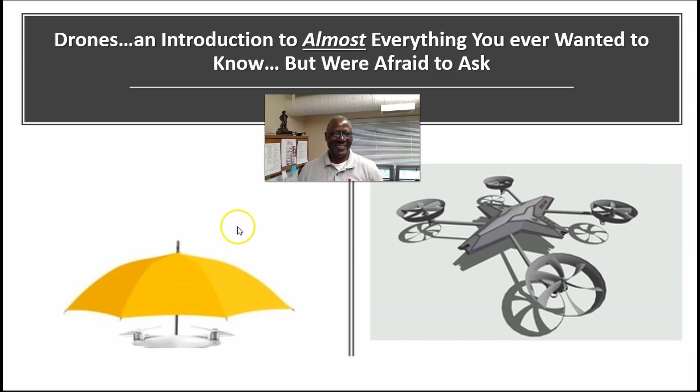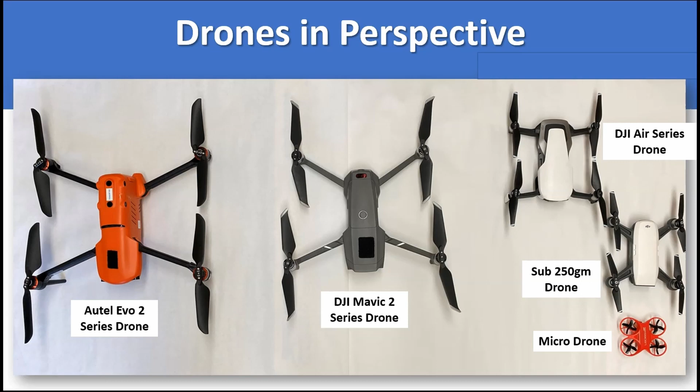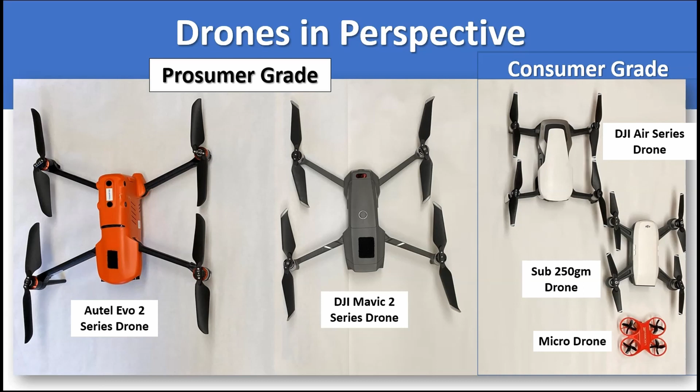Now I break these drones down into two types of categories. One, you have your consumer grade drone. It's not to say you can't use these drones for other things, but the primary purpose is for the typical consumer. They're using it for photography, for entertainment, for hobbyists, for recreation. Then you have what's considered the prosumer drone. The prosumer grade drones are those used in business, for work, for landscaping, for construction, for inspections, and those types of things.

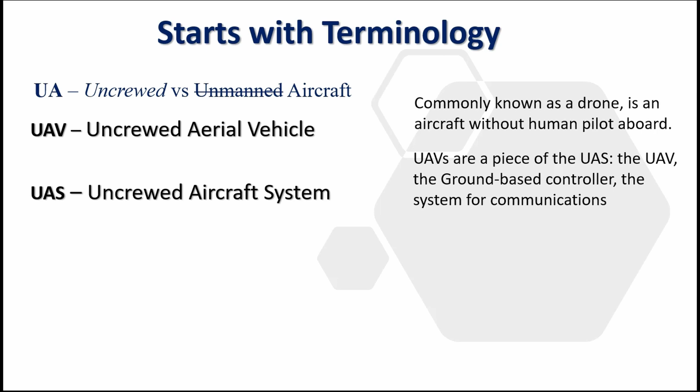Let's start with the terminology. The terminology UA, or uncrewed versus unmanned aircraft, is something the FAA and others are now trying to move away from to make it more gender neutral. The UAV, or uncrewed aerial vehicle, commonly known as a drone, is an aircraft without a human pilot, and that's the important piece. The pilot isn't aboard the drone actually operating it and causing it to go one direction or another. The UAS, or the uncrewed aircraft system, includes a UAV as a piece of the UAS, and all that term really means is that you're including the other components that go with the drone itself.

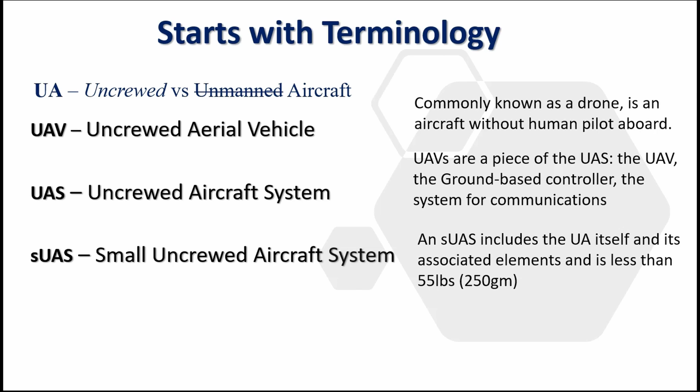Finally, the SUAS, or small uncrewed aircraft vehicle or system, is anything below 55 pounds and above 250 grams. This is often considered a distinction without a difference, because you hear the term drone and often you'll refer to it or reflect on some type of drone.

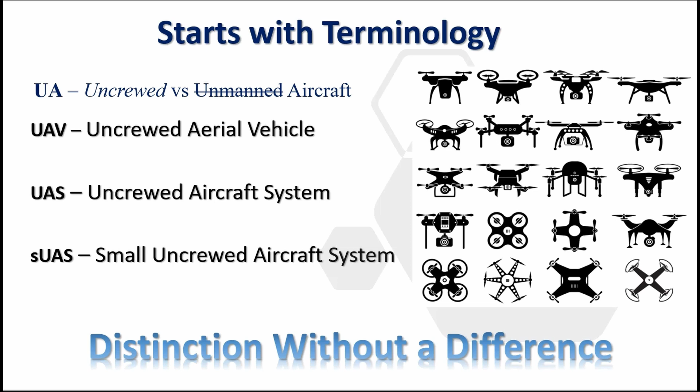As you'll note in this simple pictograph, the drones have a variety of different configurations as well as their specific capabilities and abilities.

Oftentimes, people mistakenly think that drones are there to spy on you, or to look into windows, or into glass doors or whatnot. So what I did was I put together a very short video to demonstrate that that's not quite the capability of a drone.

So that's hopefully going to help debunk the myth that drones are used to go and spy on people or to look in on people.

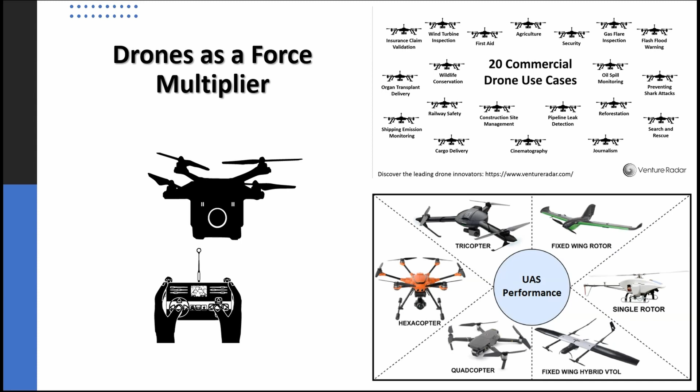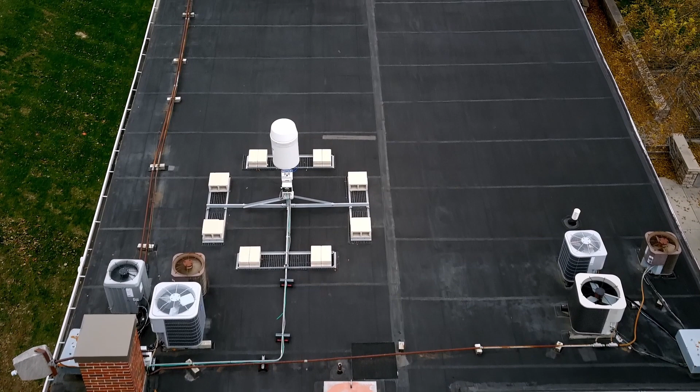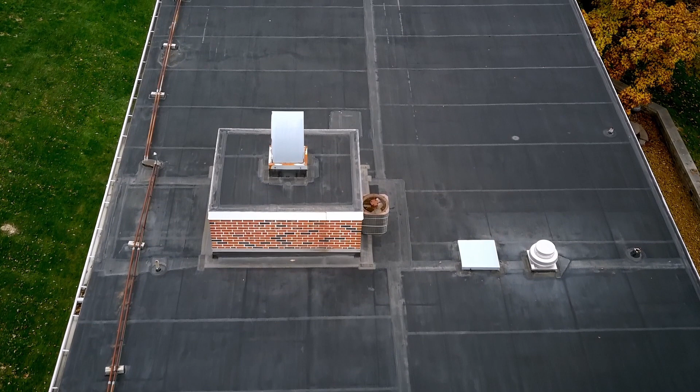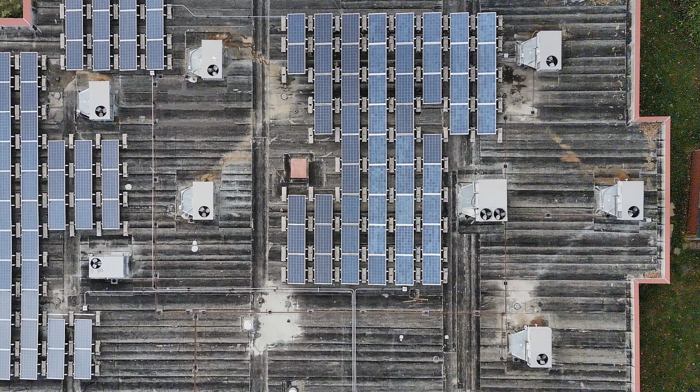One of the most common uses for drones is the roof inspection or roof assessment. This saves both time and increases the amount of safety.

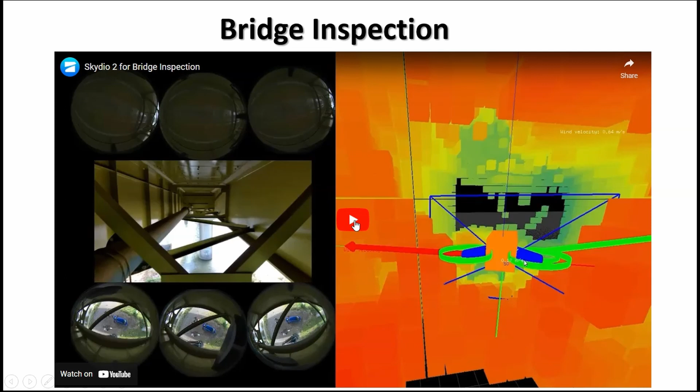The next use case is bridge inspections. Bridge inspections are by and large very hazardous, very time consuming, and can be very difficult to do, and for that reason they're almost always done by hand, in person, one bridge at a time.

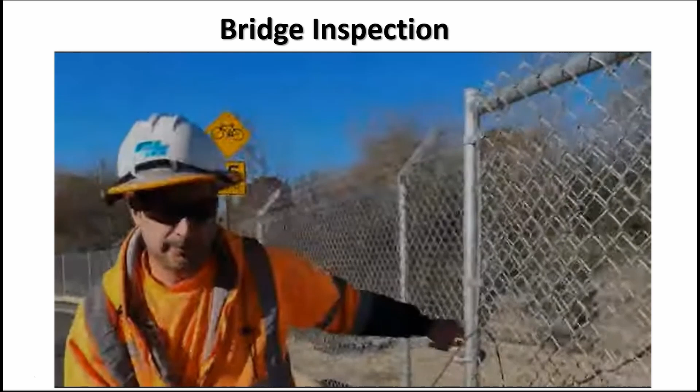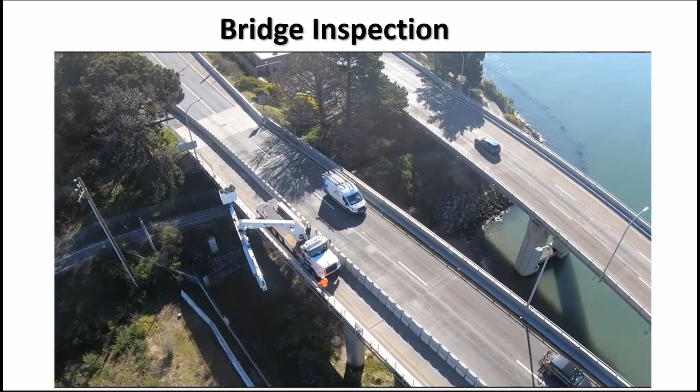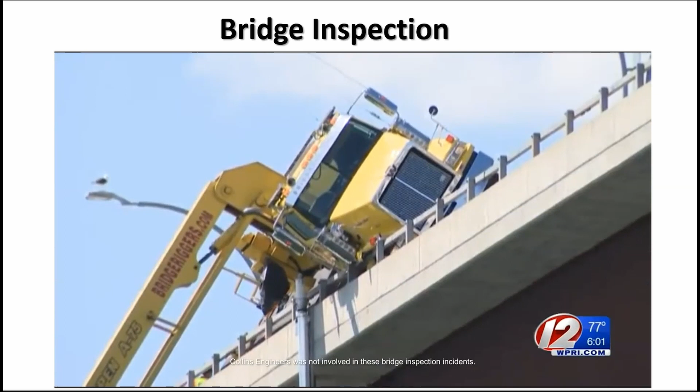In this case, the bridge inspection was being completed. However, the truck used to conduct the bridge inspection has 2 people on the underside. This truck had an incident and it fell over. As a result, the individuals were trapped in the truck until they could retrieve them with another truck and pull the bridge inspection vehicle back.

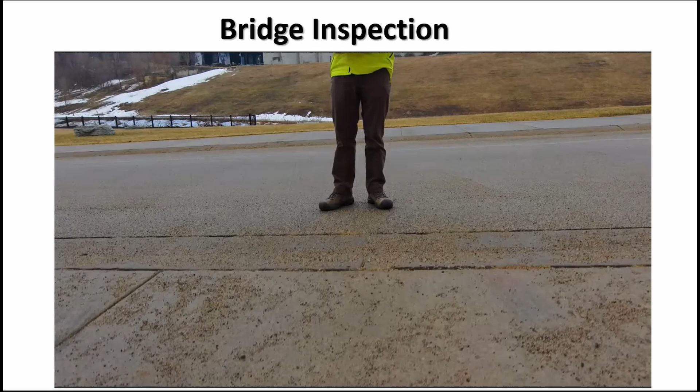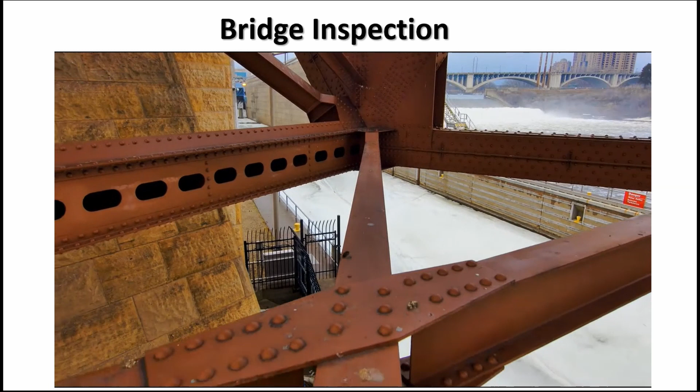When they were using a drone, in this case this particular model, they were able to conduct the same bridge inspection with no mishaps. Using the drone, they were able to get inside, get high definition photos and videos, and very accurate locations of areas of interest for the bridge itself.

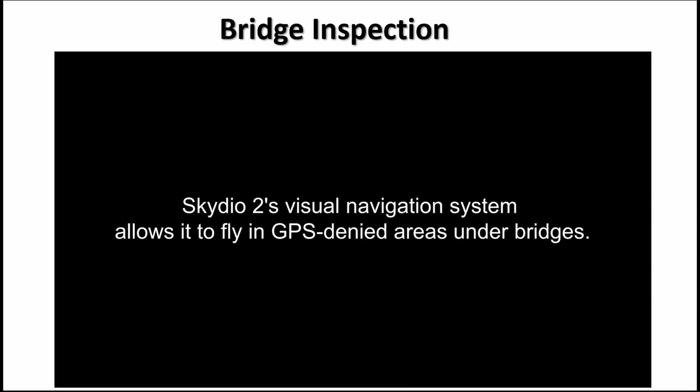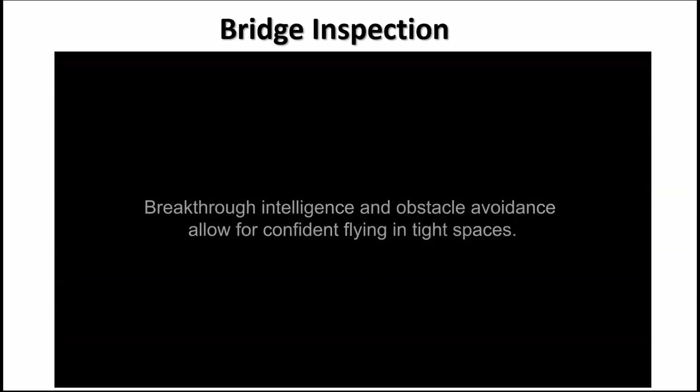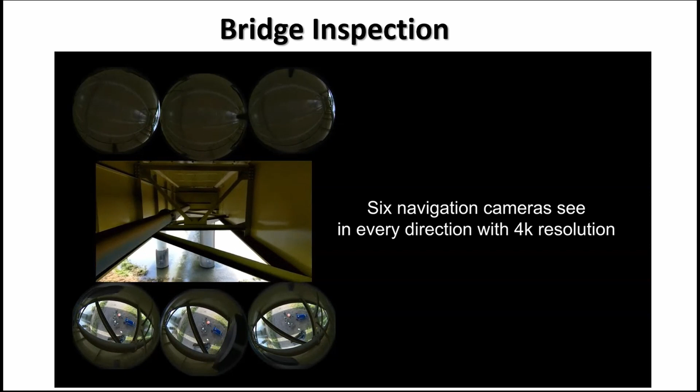Even though the bridge is made out of primarily steel and concrete, the GPS, or Global Positioning System, that is usually needed for most drones wasn't needed in this case. The drone is able to navigate autonomously by building its own reference as to what that area looks like. This keeps the drone from running into areas on the bridge and crashing.

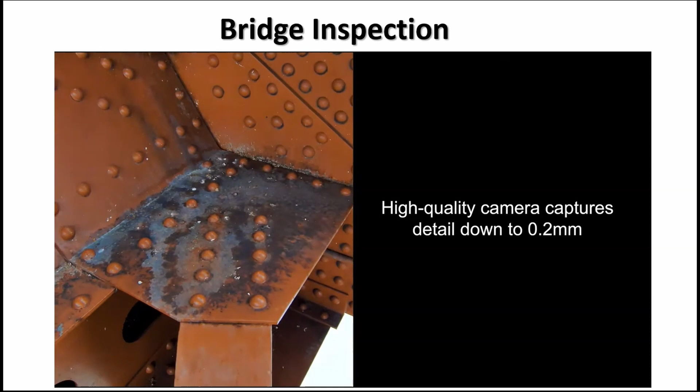The high quality camera really came in handy for this particular bridge inspection.

Oftentimes, you will see drones used in cinematography. In this case, this is a short video clip from the movie Ambulance. In this movie clip, what you can't see is where the drone is actually flying, but what you can see is the results of the drone. Let's take a look.

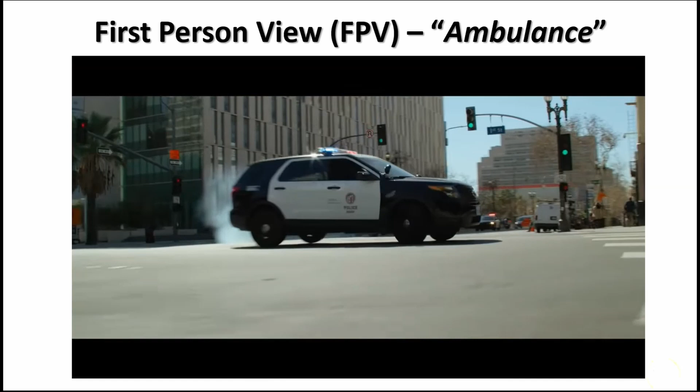This is one of the foremost experts in drone flying. He is a champion drone flyer. These are scenes that are shot with the drone, and you can go on YouTube and download this or take a look at this in depth. But what the actors and the others are saying is that with the drone, you can get other pictures, other scenes, other dimensions that you couldn't get otherwise.

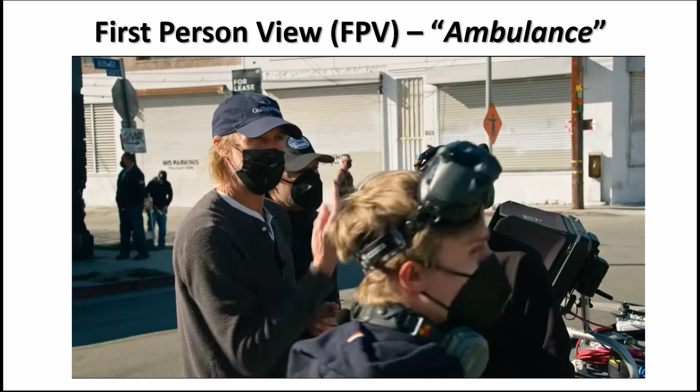Here are some of my favorite pieces of the movie. Once you get into the movie itself, you'll see how very technical, difficult, and challenging it is to fly the drone at high speeds in these particular areas.

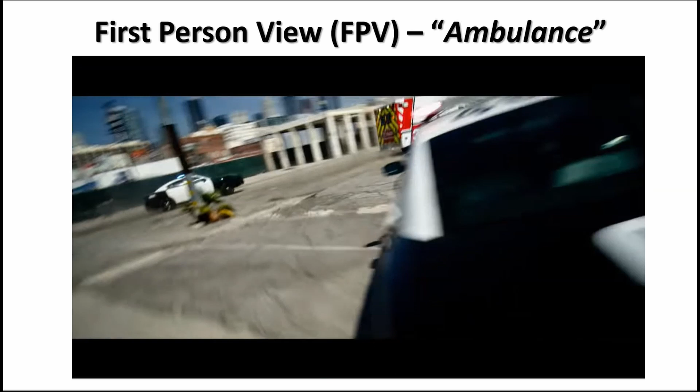This is called, again, FPV, or first person view. So this is a shot that you couldn't get with anything other than a drone, unless you drop a camera from a helicopter. This is another shot of the drone.

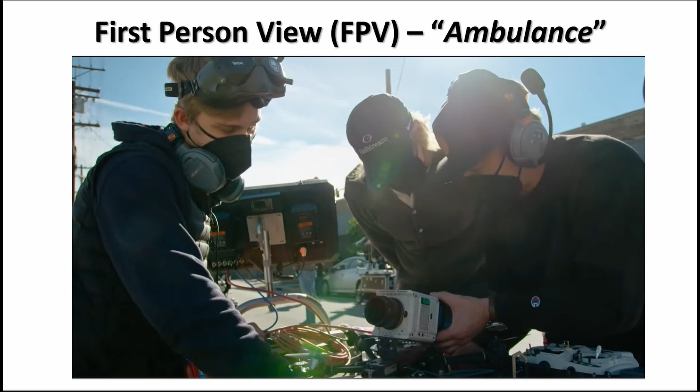And this is probably one of the most impressive shots of the movie. It's not the most impressive, but right there, the drone flying in first-person view was flying underneath the car as it was transitioning over an obstacle. Again, there are many other aspects of the movie and the use of the drone itself that really make it very interesting.

There are two basic uses for drones: the drone hobbyist, and the drone professional, or commercial drone pilot.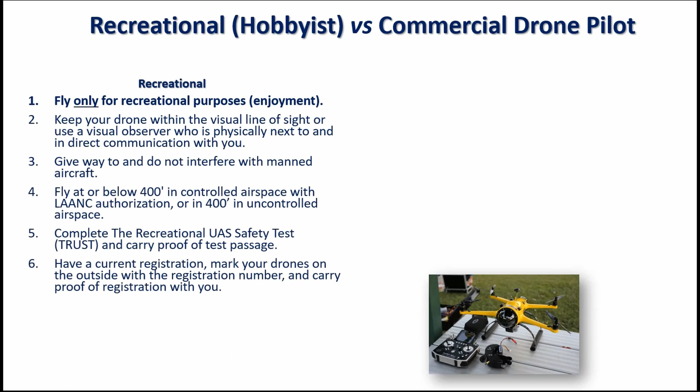To summarize, recreational pilots fly only for recreational purposes, for enjoyment. They are not compensated or remunerated in any way for the images they capture, whether photographs, video, or other types of imagery. There are some other limitations as to where they can and can't fly. One of the big things is to complete the FAA's Recreational UAS Safety Test, or TRUST Test, and then you have to carry proof of passing that test with you, as well as a copy with your drone.

The commercial pilot can fly for fun, but she or he must first pass the FAA's Remote Pilot Certificate and get the SUAS airman rating as a result of the Airman Knowledge Test. The test itself is 60 questions. You have 2 hours in which to do it, and it will cover all aspects of aviation with regard to drones and some fixed wing, as well as airport information.

Included in there are sectional charts. How do you read them? Weather, how is it identified? Airspace, controlled airspace, uncontrolled airspace, and airport operations.

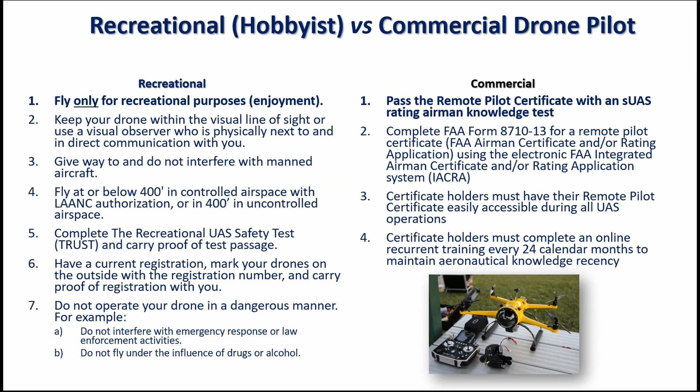I highly suggest and recommend that anybody who's going to fly a drone first go and take the TRUST exam. Again, if you're flying a 0.55 pound or less than 250 gram drone, this is not a requirement. However, anything that's over 0.55 or over half a pound is something that's required. This is a test that is required for the operator to fly legally in the national airspace.

Finally, just walking through a few things dealing with the recreational or hobbyist pilot, some of the things that you might be familiar with seeing. These are the types of drones that oftentimes they fly and enjoy.

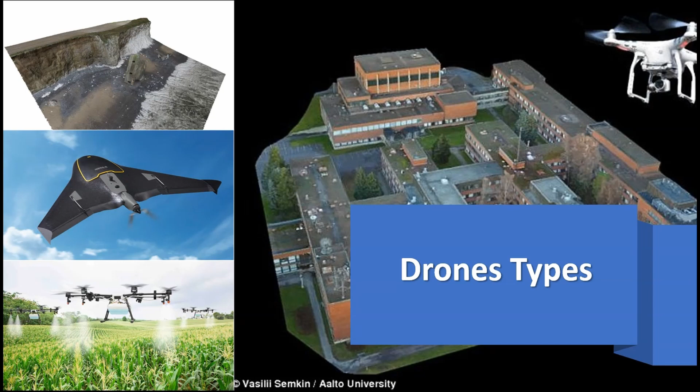Other applications for drones: mapping and modeling, agricultural analysis, as well as spraying crops.

There's a lot of limitations to drones, which is why they're not exclusively used either in cinematography as well as in other operations. Their primary limitation is their size. The other limitation is the length of time that they can stay in the air. Most drones, commercial grade drones, operate at about 30 to 45 minutes, some a little bit longer, some a little bit shorter.

Again, the SUAS with less than 55 pounds. These are just some of the general things that you would need to know in order to successfully take and pass your Part 107 FAA test.